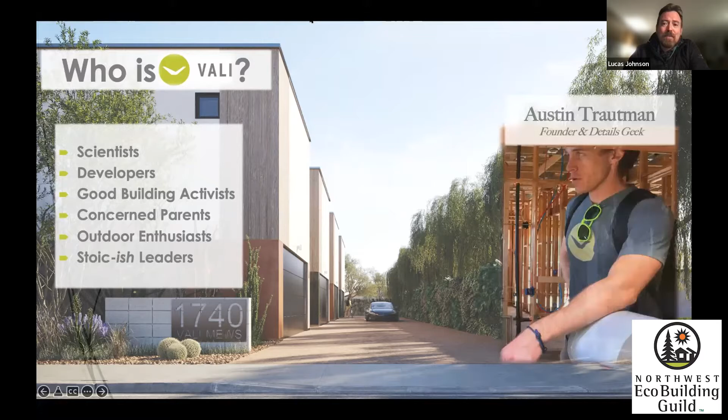So this is Austin. He's my business partner and the founder of the company that I joined. And this is me, Chief Building Nerd. And thanks so much for joining tonight. Oh, I'm also very proud to serve as a board member of the Northwest Eco Building Guild. It's been my favorite organization for a very long time now.

In that, I think the most special part about it is it's an organization that's based on inspiration, education, and not being set on one given standard, just the general concept of eco building, not a specific certification, but the general idea, which is pretty impressive that it's been able to exist and grow for so long without having itself tied to something specific. So what's the big picture?

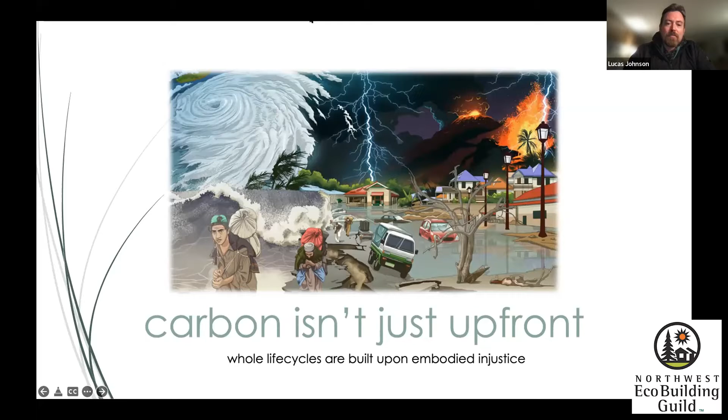Well, humanity is going to have a really rough future without some radical changes in social justice in the built environment. Just setting some context. And carbon isn't just up front, as in it's not just embodied carbon, but it's also not socially just up front. Whole life cycles are built upon embodied injustice.

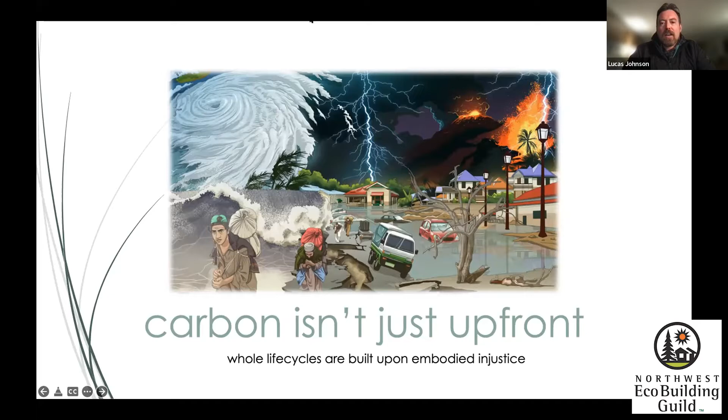If this is a concept you're interested in digging into, I've been working on a series of presentations and some research around this. My wife is a cultural anthropologist. She's a professor at U of A. That's why we live in Tucson these days after leaving Seattle. So anyhow, this is a very important subject, but not the subject of the day.

It's our imperative to solve these problems, these problems being carbon, social justice, and the less than ideal way that we have been building historically. A lot of what we're doing might not be helping. There's a lot of very well-intentioned, truly good people who are out there spraying stuff like soya spray foam, thinking they're doing a great deal to help improve the world, when in fact they're probably not.

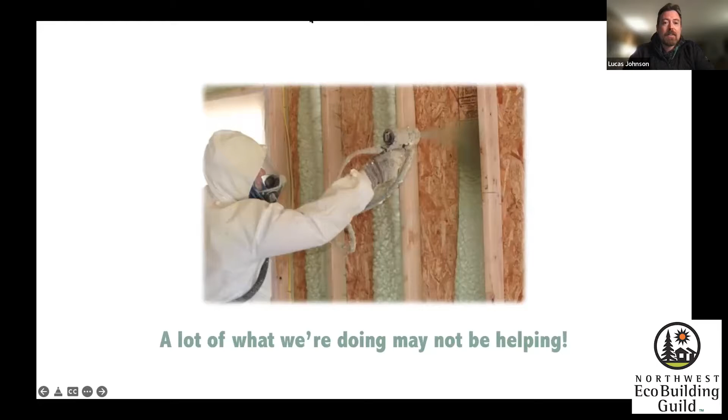I've used this quote in many of my presentations. It's one of my favorites. Our greatest fear should not be failure, but of succeeding at something that doesn't really matter. And the tough pill I'm going to ask everyone on this webinar this evening to swallow is that our incredible strides towards creating a more energy efficient built environment have not necessarily been beneficial for carbon. Turns out when you use more bad ingredients to reduce carbon impact, it often doesn't actually work out.

So there's a lot of certified buildings, and this is not a dig on Passive House whatsoever. Passive House is incredible. You should do it if you can afford it. It's an absolutely wonderful standard for efficiency, but it's incomplete in that it doesn't look at where the largest piece of the carbon comes from in as great detail as it does with energy efficiency, especially not yet. It's definitely moving that direction.

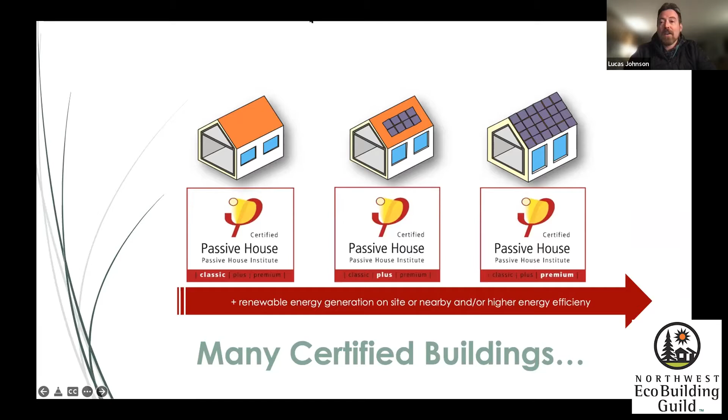But what I ask is to not feel bad about past work. Don't take this as criticism. Just say, you didn't know about Passive House or energy efficiency at some point. This is just like learning about those exciting new things again. We've got to do energy efficient building, but we have to do that building with carbon effective products, as I like to call them. So a lot of these certified buildings, as I've talked about, don't deliver holistically.

The guy in the center here is Chris Magwood. He's been a huge inspiration for me. I particularly love that he created an elephant out of carbon dioxide molecules to talk about the carbon elephant in the room, which is very much that we have been ignoring to a large degree upfront or embodied carbon, the material carbon emissions as they've become called within this methodology I'm talking about tonight.

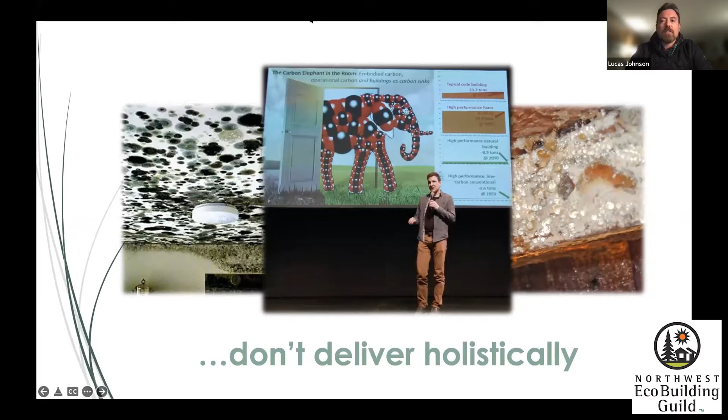In addition, beyond the carbon, there have been a lot of other failures. Vali Homes has put together a system we call the 5 factors of good building, which is a design tool to address comfort and health, efficiency, renewables, durability, resilience, social equity, embodied injustice, and life cycle carbon impact, plus a lot of other stuff, but those are really the core features that we look at, other stuff being cost, constructability, making the project real, usually important. But today we're going to dig into life cycle carbon impact because it's really one of the most misunderstood concepts in the built environment at the moment.

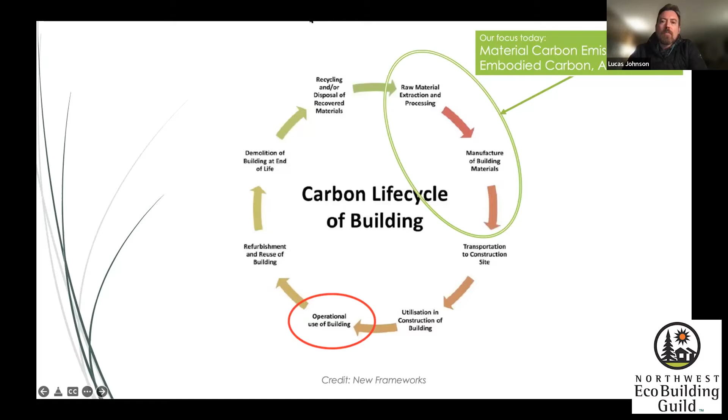So what is the carbon life cycle of a building? Well, our focus today is what we call material carbon emissions, which is, in this case of the BEAM tool and the way that we talk about this, the first part of the EPD, the A1 through A3 part of the analysis, which is mostly the raw material extraction, processing, and the manufacturing of building materials. This is controlled by suppliers and manufacturers, not so much by builders. This, as professionals, is the area that we can really control and work hard to reduce, right? Can we reduce the impact of transporting things to site? Can we reduce the carbon impact of installing those materials?

This part is why durability is so mission critical. As mentioned earlier, if we have good natural insulation, for instance, that's torn off the building and then burned back into its basic components, then that carbon storage is no longer really that relevant. But if that happens, say 300 years later, and maybe it's composted instead, that could be a very different net result.

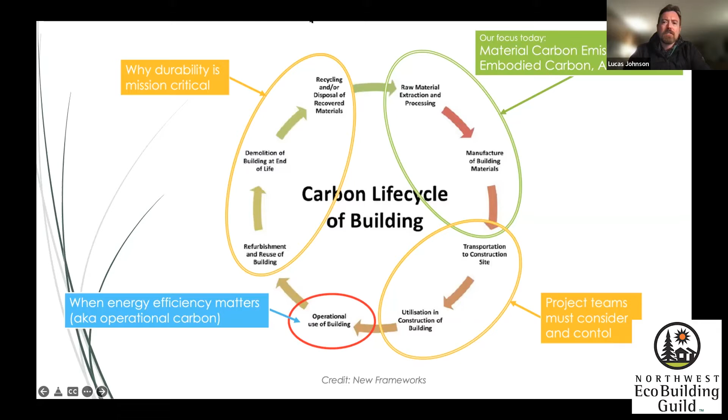This little phase here, the operational use of building in the red circles, this is when energy efficiency matters. And it matters. Energy efficiency is very important, but by looking so specifically and directly at energy efficiency above all else, we've missed looking at a lot of other important things.

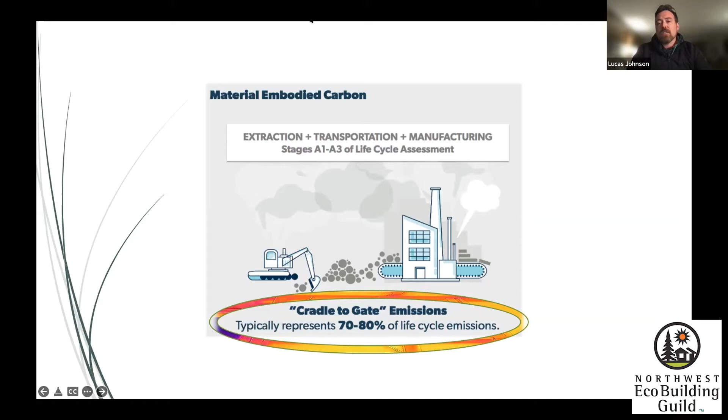So material embodied carbon, this stuff gets complicated because it's an area where there's still some debate and way to go on as far as formalizing the language and vocabulary we use around these subjects. But in the terms of BEAM analysis and other things, we're mostly looking at these cradle to gate emissions, which is A1 through A3 of a life cycle assessment, which amazingly typically will represent 70 to 80% of the life cycle emissions. So if we want to get serious about carbon, we need to be serious about the materials that we use.

Materials matter. I'm borrowing these slides from Chris Magwood, who you saw earlier. This is research that he did around the Toronto area in Canada. This is the same building, and we're looking at how different the upfront carbon is of this building. If you use high embodied carbon materials, you can end up with about 241 kilograms of CO2 equivalent per meter squared. That sounds kind of complicated, but suffice to say that's a very high number per meter squared. If we pay a little bit of attention and try a little bit, we can get that building pretty darn easily down to about 90 kilograms of CO2 equivalent per meter squared up front. Still not so great.

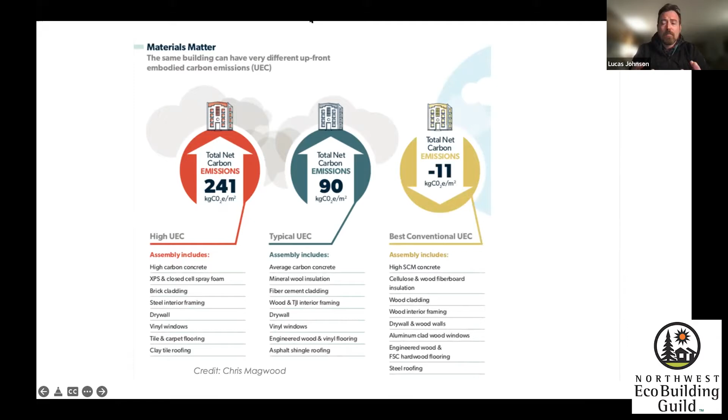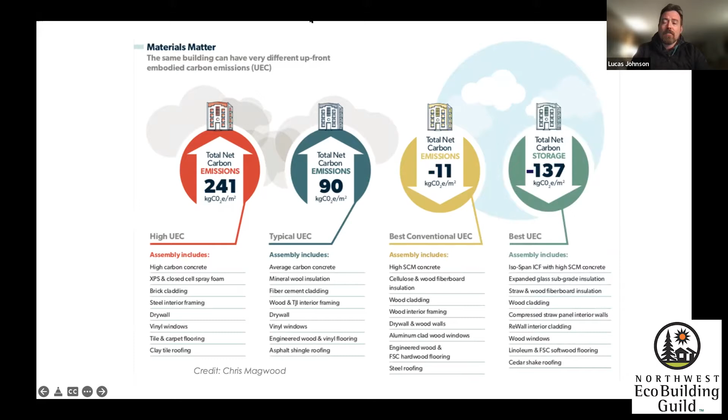If we try really hard with our specifications, but really don't change our design that much, in other words, build a code building with good materials, we can have a carbon storing building up front. And now the real kicker, the secret weapon here, if you will, that I think us as eco-builders should be very interested in, is by really maximizing both our design, our long-term performance, but also most importantly, our upfront specifications, we can get to very, very significant levels of carbon storage upfront.

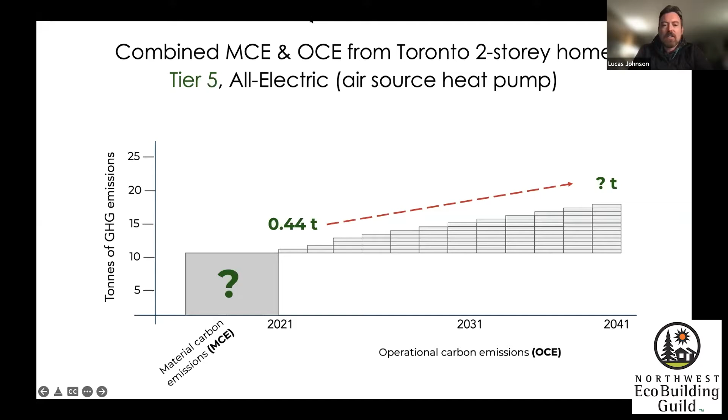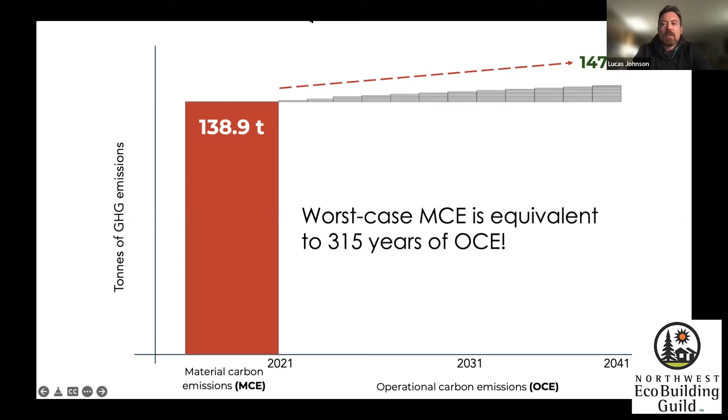So what does this mean over time? Over the next 20 years is what we're looking at here. This is again analysis from Chris Magwood's research. So we have this question mark there. That's our material carbon emissions. So how much carbon is going to happen up front? How much weight are we putting on up front before we start going on this efficiency diet, or this carbon diet, if you will? Well, if we're putting on almost 140 tons, that's about 315 years of operational carbon equivalent. At this point, it's pretty irrelevant how energy efficient this building is, because there's no way we're paying back the upfront carbon in a meaningful timeline.

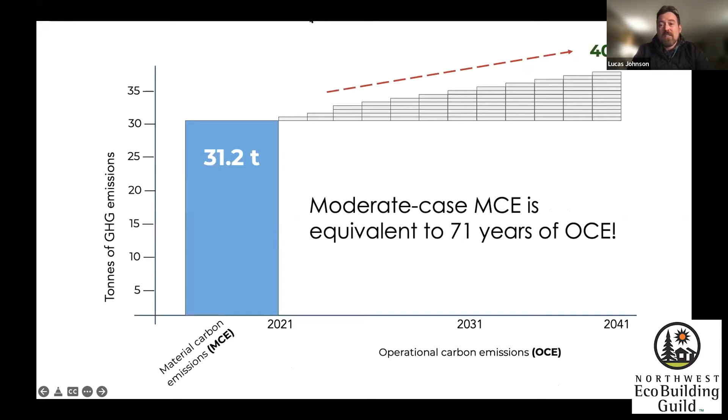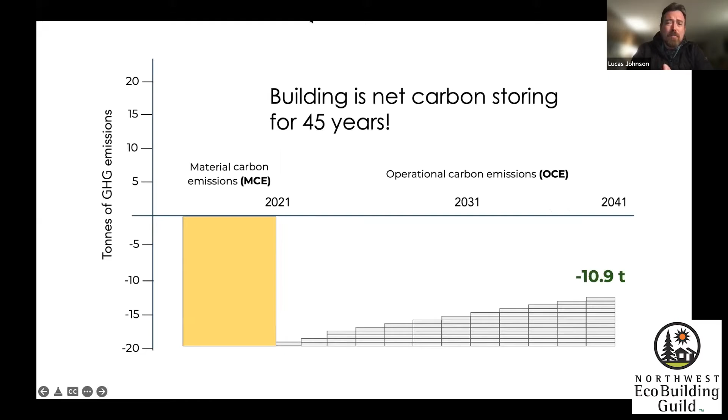The moderate case would be about 31 tons, and that's still 71 years of operational carbon equivalent. That's far, far too long to be meaningful. For the code built with good materials, low carbon materials or carbon storing materials, most importantly, we can have a building that's carbon storing for about 45 years. That's pretty game changing. Now, if we get all the way to the most aggressive type of design and material selection, we can be net carbon storing for almost 200 years. That is truly a game changer.

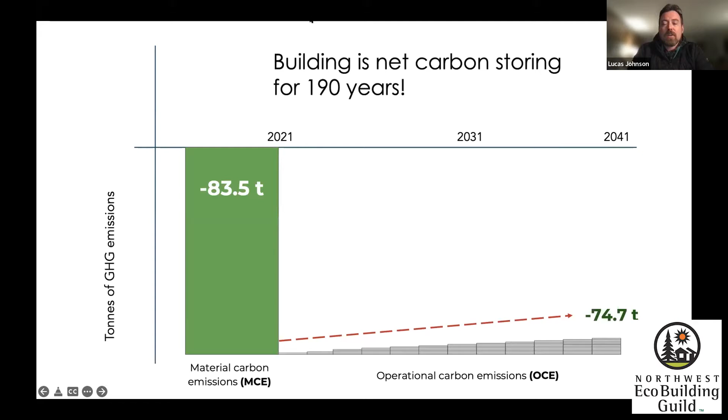And not everyone's going to hear this and learn this and care about this and change. So my argument is that if you can, we should always aim for this result. We might not get there, but we should always be aiming for as much carbon storage as possible.

So summarizing this in one graph here, this is a high carbon materials, low efficiency building. The gray is the efficiency, the red is the material impact. In this case, we have a high carbon building that has high efficiency levels. High efficiency is great, but it doesn't do much for carbon in this case. Mid-carbon impact materials, at a low efficiency level. Noticing a trend here. The efficiency doesn't really make a difference within a meaningful timeline in most areas for carbon impact.

It's the materials that make the difference. So here's our low carbon, low efficiency building. Still not necessarily so great if you think about that. So maybe we need to do a low carbon, high efficiency building, right? That's where we really get into some actual carbon storage potential. And then if we get really aggressive, again, maximizing our performance as well as our material selection, then we can get to a truly deeply carbon storing building.

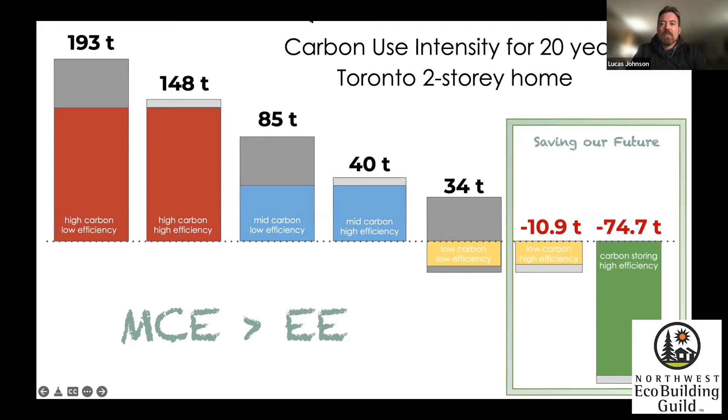So recently I've been saying that material carbon emissions are greater than energy efficiency. In terms of carbon, that is across the board seeming to be true. Very rare to find that's not the case. Again, efficiency matters. We should do efficient buildings. But the thing we cannot sacrifice is using low carbon, good materials to build those buildings. That's the shift we need fundamentally. Because using that type of material puts us in the zone of actually saving our future. Or, as I like to say, the ingredients create the results.

As mentioned in detail earlier, how do we find out what these ingredients actually are and what these components, these materials we're putting into buildings, are actually made out of? That's environmental product declarations, EPDs. There's definitely a way to go with precision in this kind of analysis, but the accuracy is within the degree that's necessary for creating meaningful results that are actionable, right? So yes, we have a lot of debate to go on precision and getting some of this stuff correct, but it's accurate enough to be very useful.

So BEAM, what we all are here for. I've been beta testing this. It's a fantastic tool. EC3 I've used a lot as well. It's a really great tool. It's not, I guess, simple enough necessarily to apply easily to residential scale construction, which is where I've spent most of my career, single family through small multifamily. So BEAM is particularly exciting to me, and in my beta testing has been absolutely game changing. So I'm going to walk you through the tool a little bit and then tell a story about using this.

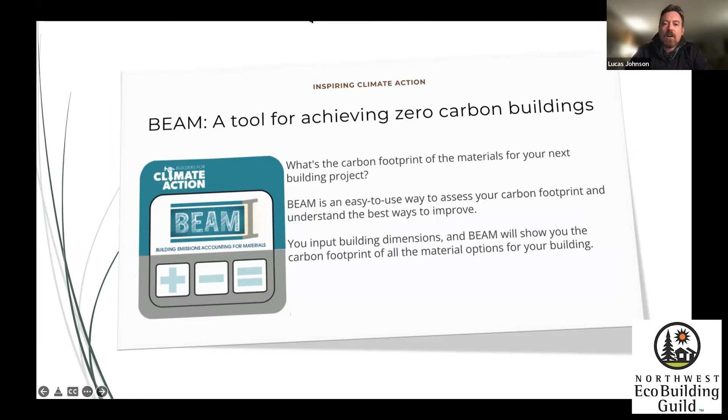So the idea is, what's the carbon footprint of the materials for your next building project? Pretty basic concept. It's relatively easy to use. If you like Excel, it's quite easy to use. It'll be in Google Sheets in the future. If you're not a big Excel analysis person, it might be a little more difficult to use, but that's to be expected for this kind of analysis. A good tool requires some good training and good skills. So it's a pretty simple process of inputting building dimensions, selecting from specific materials that you're using, and getting some nice automated results in the end. We'll go through this process and show you these steps.

So some important notes. The results from this calculator are an estimate of the material carbon emissions of your finished construction project. Again, on accuracy versus precision, accurate enough to be very meaningful and useful. Is it as precise as can be? No, of course not. There's a long way to go on precision. This calculator is not intended to be used as a program or compliance tool. It's supposed to be an easy to use, simple calculator that can be targeted towards residential construction and making decisions in an efficient manner.

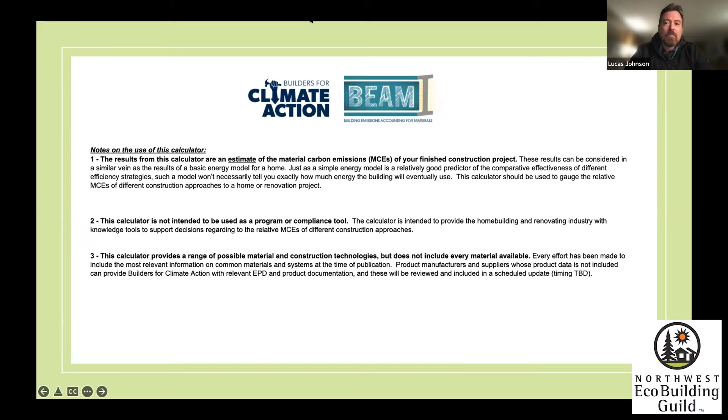And this calculator provides a range of possible material and construction technologies, but it certainly does not include every material available, far behind EC3 as far as the complete database and number of things in there. But you know, that's the story of this industry at the moment, is databases that need more inputs.

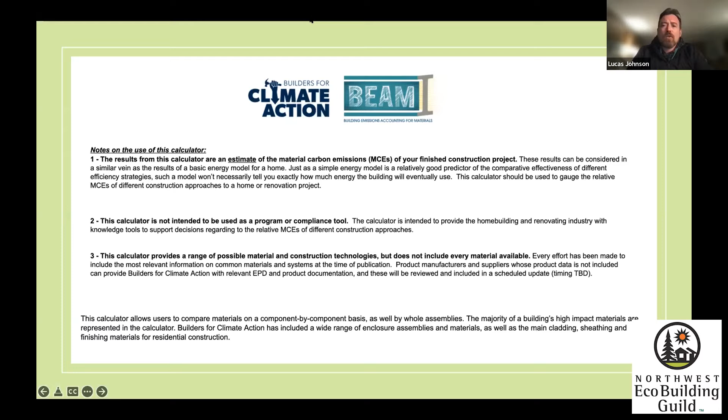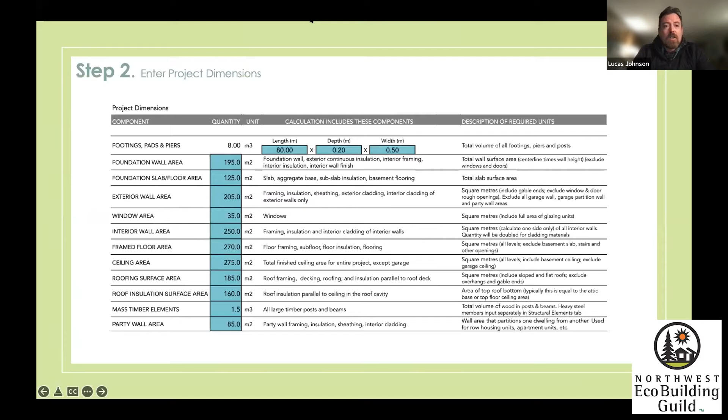So in the way that I've been using this tool, going through and comparing on a component by component basis has been really useful. Whole assembly analysis, like what is the carbon impact of this wall system versus another wall system, has been a very useful thing, but it's really been the whole building analysis that's so game changing in my experience so far using this tool. So just walking through it, step one, we enter some project info, pretty simple what it asks for. Step two is entering project dimensions. Again, pretty darn simple to find all this stuff.

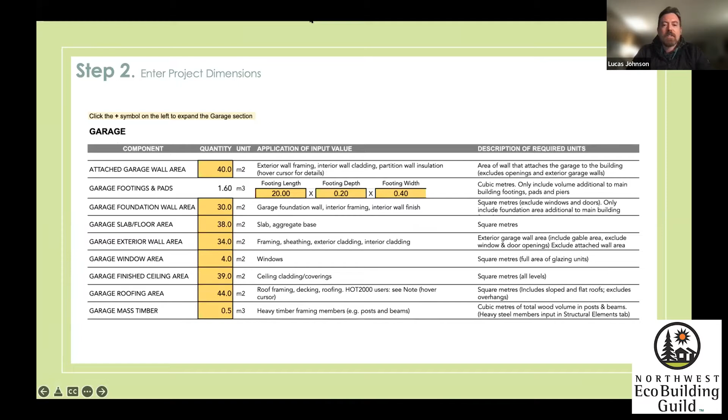If there's a garage or other units, we can add those into another form that's part of the first page, the first tab that you'll find in the tool.

And for step three, I thought it'd be a lot more useful to show this through a case study I was working on with my buddy Jeremy Avellino out in Philadelphia. He runs a company called Bright Common, an absolutely fantastic group of people doing some very, very interesting projects. So it was an honor to look at this.

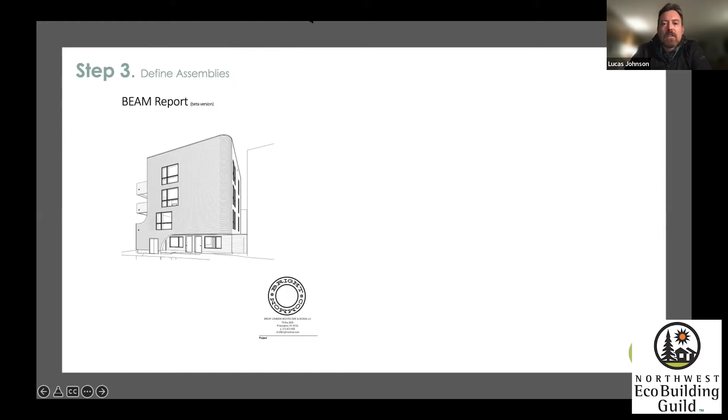This is a multi-unit, relatively small, less than 20 units, multifamily project. And through beta testing and this project in particular, I've come to believe that the BEAM tool is the missing ingredient our industry needs to move forward with verifiable low carbon construction, really at the residential scale. And that's really been a massively missing piece.

So before we actually get into that part of the spreadsheet, it's also important to know the context of the building we're working on and look at our operational carbon, because I think the most useful analogy for people to grasp is how many years of operational carbon equivalent are built into the materials that we use in constructing the building. So this is a way to get a view of that. It can be fairly complex to figure out this information, but as long as you get within a reasonable degree of accuracy, that's usually good enough.

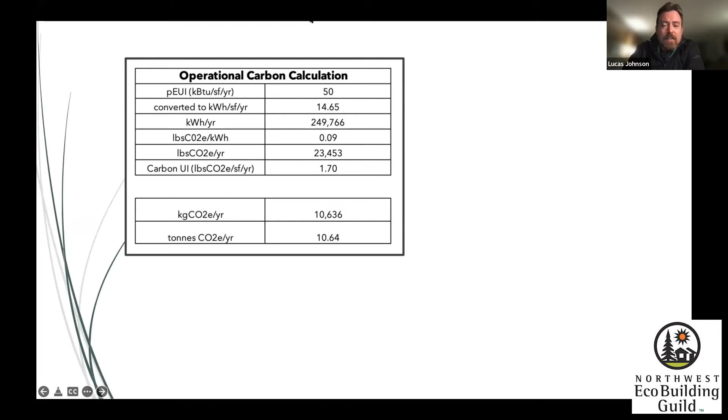So the first thing to ask is how many kilowatt hours per year is this building going to use? What's our predicted EUI? And then we can convert that, and I changed this to imperial units. BEAM is right now in metric, but it will have an option for imperial. I just found imperial's what most people work with around here.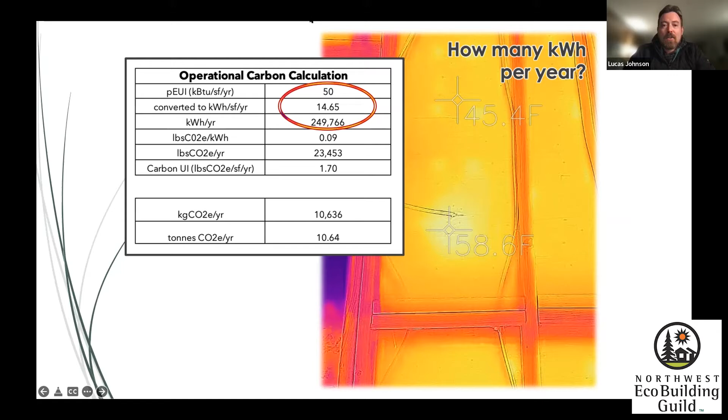So the answer turns out to be about 250,000 kilowatt hours per year, but we need to look at how many pounds of CO2 equivalent exist per kilowatt hour, because that changes dramatically. In Tucson, it's very high, about 1.8 pounds. In Seattle, it's closer to what it is in Philadelphia, which turns out to be about 0.09 pounds, 0.1 pounds per kilowatt hour.

And then we multiply these things together and we get an expected pounds of CO2 equivalent per year that's going to happen with this building. So in this case, about 24,000 pounds. And also we can look at that per square foot and have a carbon use intensity, and that's 1.7 in this case.

Oh, and little pro tip, this is a photo from a project in Phoenix where we used Gutex wood fiber on the outside. And our carpenters got a little aggressive with the number of fasteners they used. And we found that that can actually be a significant challenge in terms of thermal bridging. So really be careful about how you place your fasteners and how many fasteners you use, especially when you've invested in really good insulation.

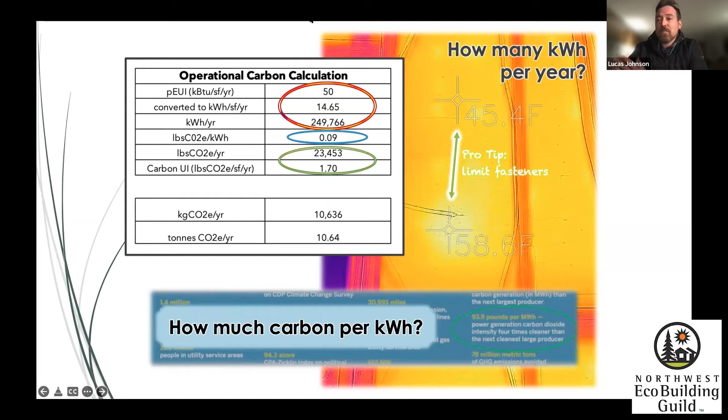So these are screenshots from the calculator I ran for this project. This is the Excel version. When it's publicly available soon, it'll be in Google Sheets for many reasons, making updates easy being the biggest. So I entered the project dimensions, and then we went through and defined assemblies and reviewed embodied carbon results. So I'll take you through that process quickly here.

So in defining assemblies, one of the things that had been suggested by the energy modeling team is switching to XPS instead of EPS because it's R5 instead of R4. Well, it turns out that incremental increase in energy performance is certainly not worth the about 10x increase in carbon impact with XPS. This is again on average, but just looking at this generally for the sake of this presentation. And for the sake of not revealing all the details of this other project, I chose mostly the averages in this.

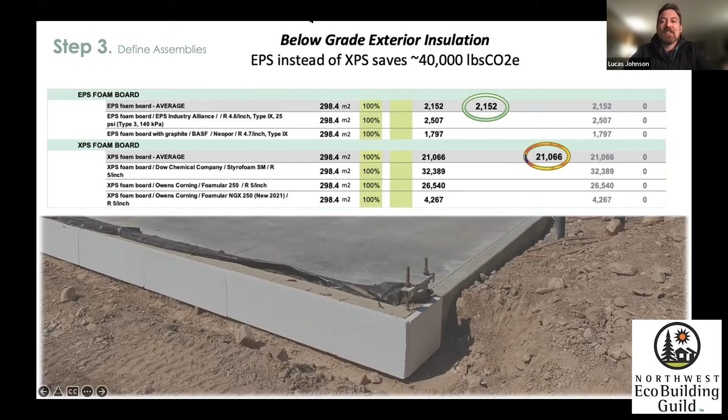Then we looked at flooring, for instance, right? Our flooring systems and the inner floor cavities as well. And what was really interesting to find out is, given FSC wood or really low carbon wood, 2x12s instead of TGIs for our floor systems could actually save a lot more carbon, create a lot more carbon storage up front. Very interesting thing to find out.

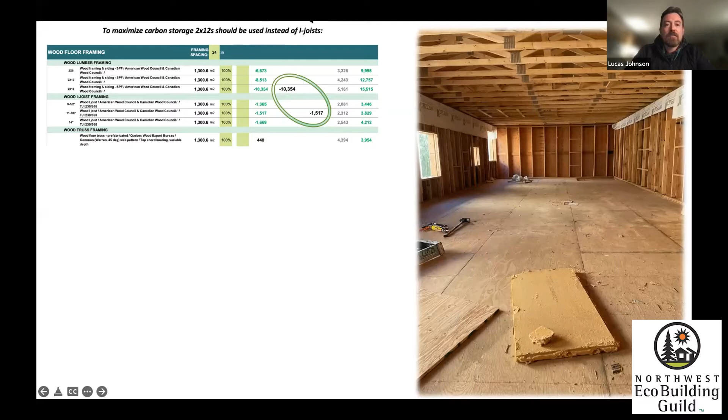Another thing, and part of why we didn't do Advantech in our own project, which you see on the right there, which is the Muse project in Phoenix that we're working on with those 4 units, is that Huber Advantech turns out to be kind of a hidden carbon bomb compared to good old plywood, right? It's about, wow, that time it's like 8x.

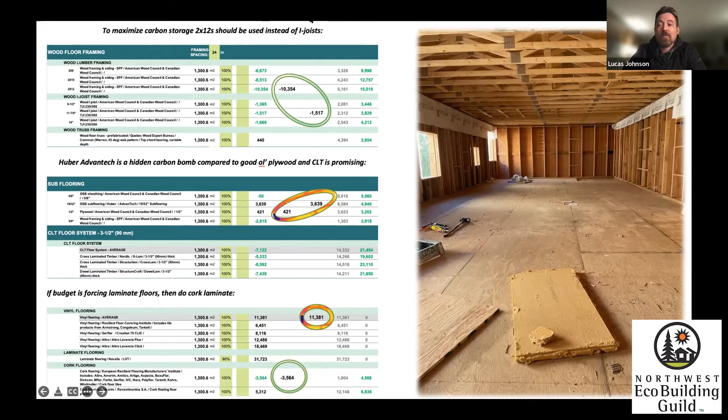And if budget is forcing you to do laminate floors, which is often the case, it turns out cork laminate floors can be carbon storing, whereas typical vinyl flooring or other laminate flooring can be extremely high carbon impact. I didn't circle it, but you can see there that there's a type of laminate flooring that has almost 32,000 versus negative 3,564 for the cork flooring. So major difference there.

Exterior insulation. This is a conversation I've had with a lot of people over time. Sometimes installing nothing is a lot better than installing high carbon impact insulation. Sometimes we can't afford good insulation. Sometimes we're trying to go for a super high level of performance, and we're thinking that's going to be the right thing in terms of decreasing our carbon impact. But it turns out that if we use very high carbon impact insulation to deliver efficiency, it very likely is not going to have meaningful net carbon savings over the lifetime of that project.

So mineral wool, relatively high carbon impact, but nothing compared to XPS. Again, this is a multifamily building, so these are some pretty big numbers. And then if fire code and building code made it easier to do good insulation in this type of building, multi-story, multifamily building, then these would be wonderful options to explore. Also worth pointing out that in this wood fiberboard category, there are quite a few products that are not even remotely carbon storing, and in fact have quite a high upfront embodied carbon. So all wood is not good, if you want something that rhymes to remember it.

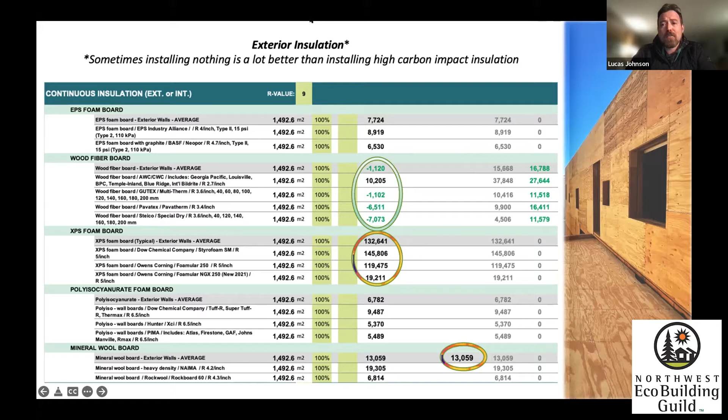Some key lessons we've learned for cladding. Well, I don't love thin brick. A lot of people don't love thin brick, but from a carbon standpoint, it might be worth exploring. It really matters to specify low carbon fiber cement cladding. That's another very surprising thing that I learned. I didn't think they'd be that dramatically different in upfront carbon.

And then taking a very careful look at what we're specifying for our interior cladding and thinking, can we move away from drywall and do something more natural potentially? Maybe not. We were considering doing a bamboo plywood interior finish. If you see the number there, it's second from the bottom. Bamboo plywood turns out to be quite high carbon impact. So I'm glad we did not go down that pathway.

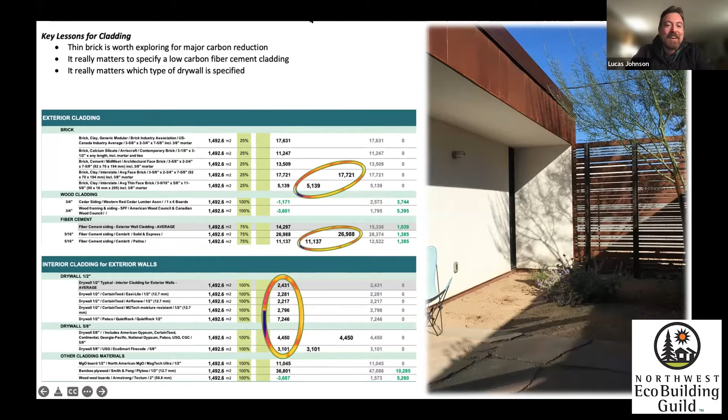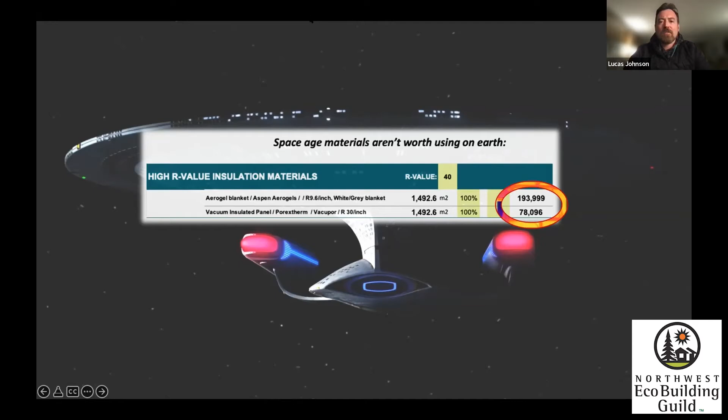And lastly in this, I just found this one kind of funny, but space age materials aren't worth using on Earth. Turns out, as you'd think, something that is going to provide R9.6 or R30 per inch, A, probably isn't that stable, and B, is expensive, right? But also the amount of energy that it takes to make something like that is just way more than we need for building products. It's a pretty ridiculous proposition overall.

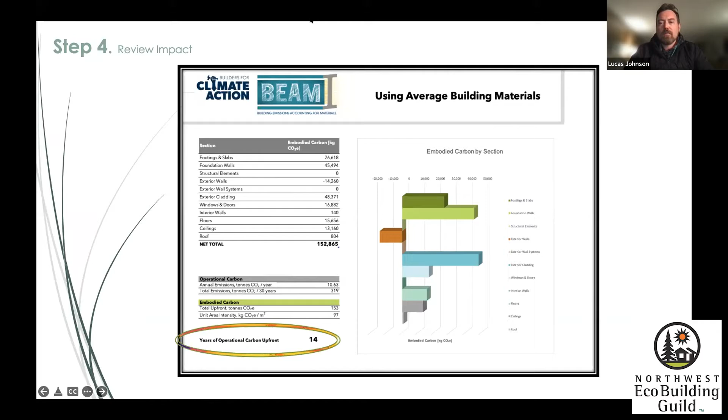So now let's look at the summary pages. If we used average building materials for this project, we would end up with about 152,000, this is in kilograms, so a little over 300,000 pounds of carbon up front. That ends up being about a 14-year equivalent of expected operational carbon, basically. If we use low carbon building materials, it ends up being a lot closer to 2.8 years built in. This is not that radical of a shift.

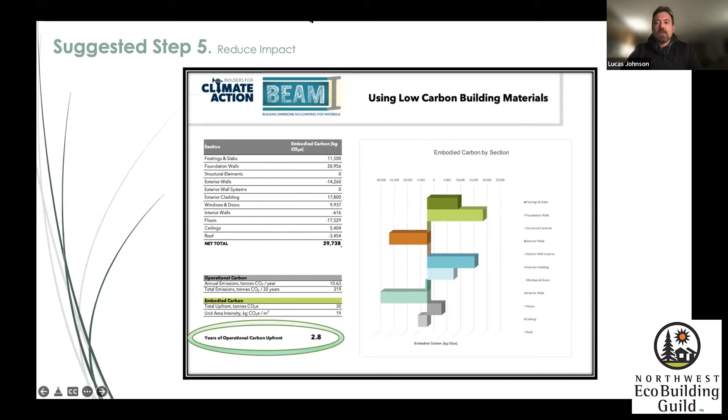And in fact, it has, in this assumption, removing exterior insulation entirely so that we can afford using carbon storing insulation inside and just making the walls a little thicker, ideally using T-stud or something to minimize thermal bridging. But it's amazing to see that with decisions that actually simplify this construction project and likely reduce upfront cost, we had an 80% reduction in our materials carbon emission through this analysis. Again, is it exactly 80%? No, but it's within reason close to 80% reduction, which is obviously quite significant.

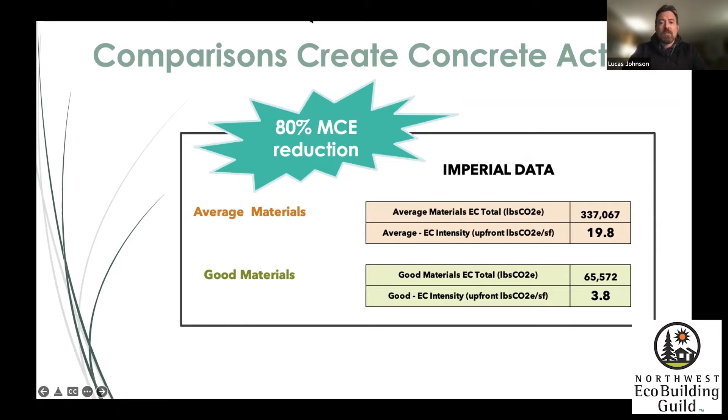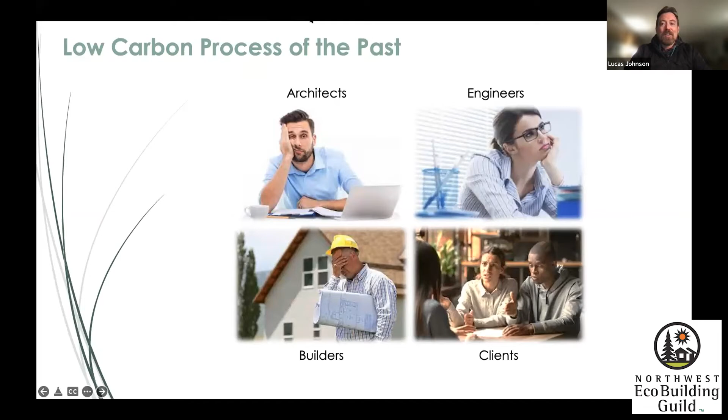I've been shocked to the degree to which people have been ready to digest this information and able to understand it well. So BEAM is coming soon. My question is, are you ready? There are going to be some new upcoming features added into there.